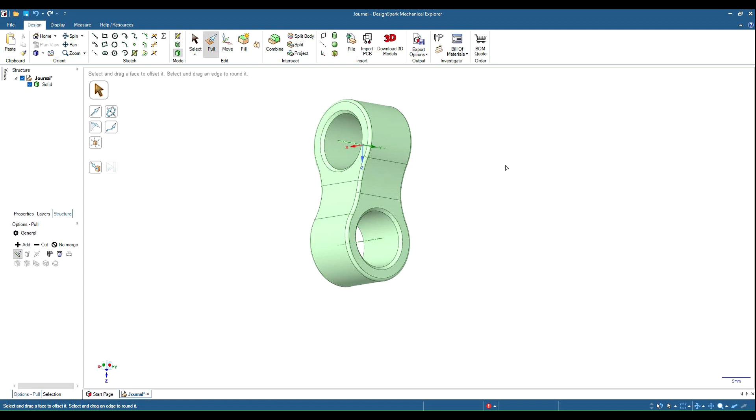This tutorial is a demonstration on how to draw this little journal sitting here in front of us. I've seen it done in some other applications and it seemed quite complex, but in DesignSpark it's not very difficult at all. So let's start with a new file.

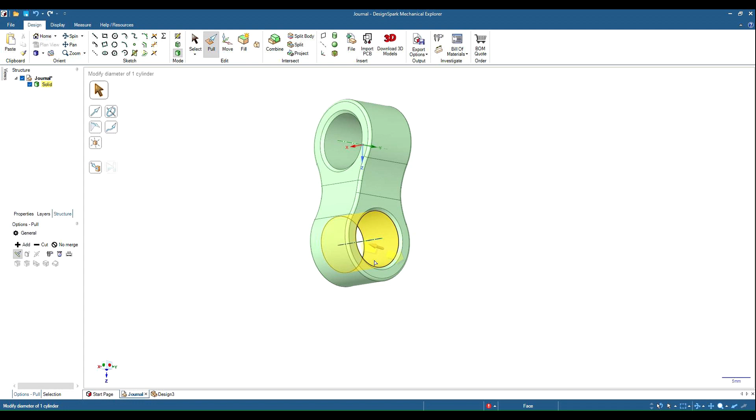We'll start with a circle, but if we go back to the original journal, if you look at it from the side, you can see that it's got a bit of a profile with a circle and a lug coming off of it. So that's where we're going to start.

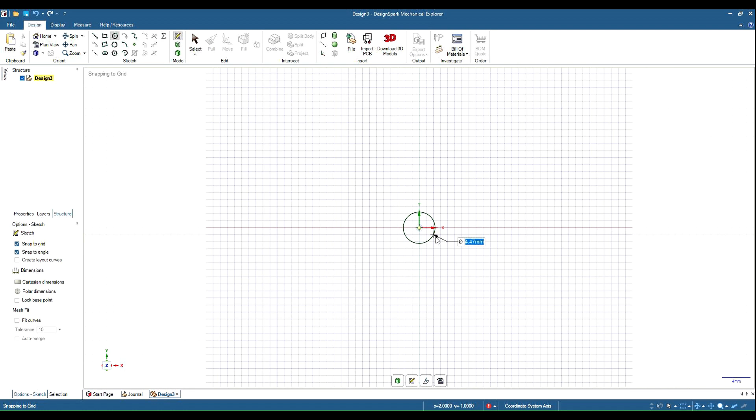So, plan view: start with a 10mm circle, followed by a 15mm circle for the outside, and I think that was 25 mils between the centers.

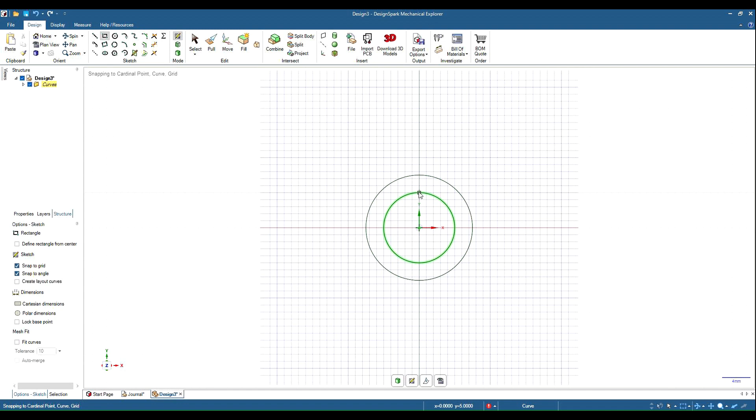So if we grab our rectangle here, you'll find the actual height of each journal is 10 mils. So if we start there, we can draw out here to the center, hit the space bar, that was 25, enter.

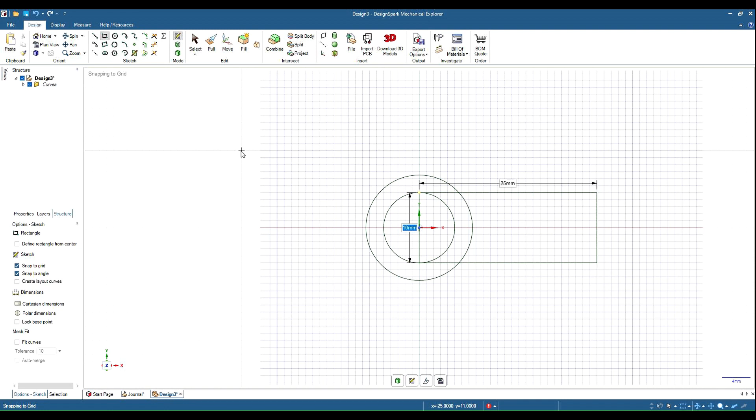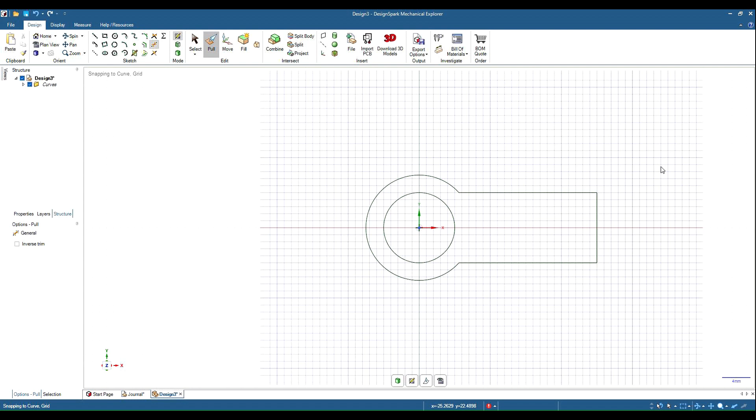Now if we grab our trim tool, we can trim things back a bit, like take that and cut things back to the basic shape of our piece. So if we can pull that now, can pull that, and it's going to be 10 mils.

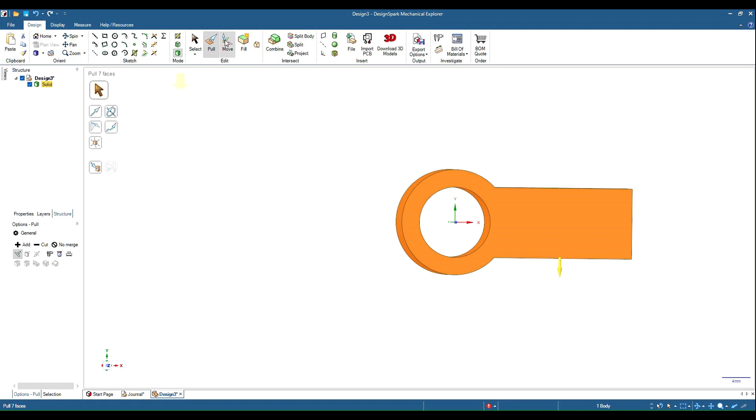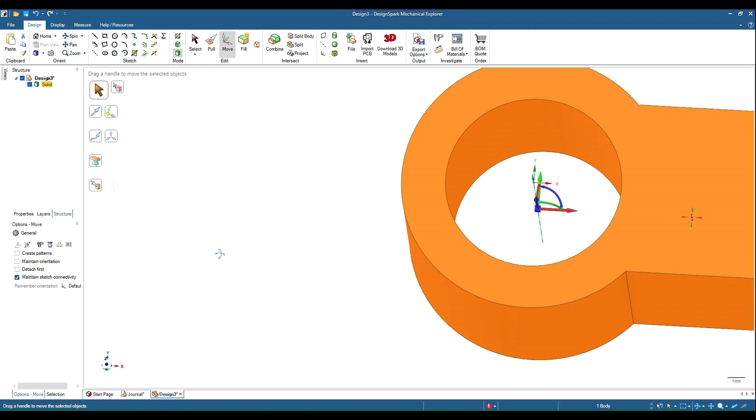And as in a previous tutorial, we do a similar sort of thing again. We draw a mark here around it, grab our move tool and move it into the center of here. Let's zoom right in and see what's going on, and we'll go like center there, back out again.

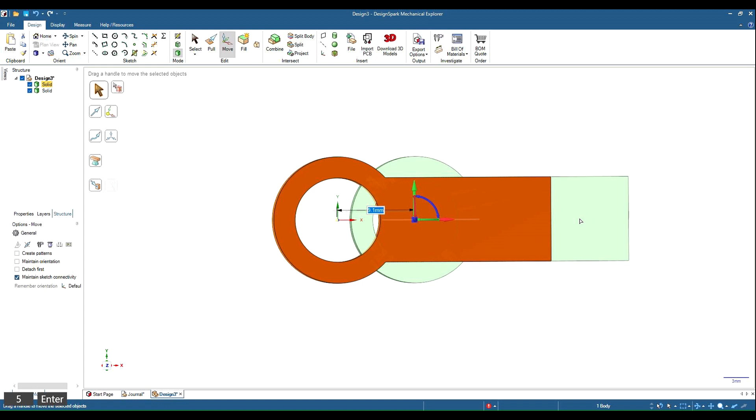So now we said with 25 mm between centers, so if we hold the control key down to duplicate, we can move that, space bar, 25, enter. Rotate it back around, space bar, 180, enter.

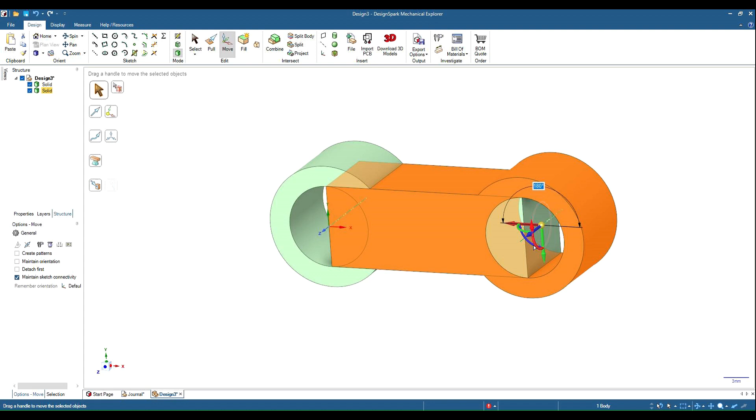Oh, there's only 180, enter. And if we go sideways here, we can grab the red tool and rotate that, space bar, 90. So there's our basic shape to start off with.

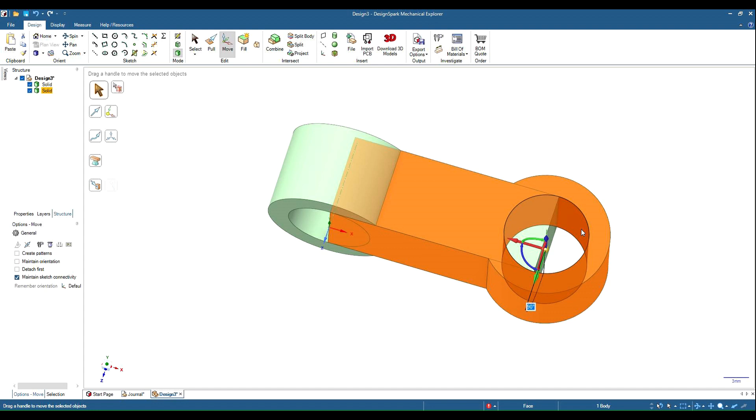Now you want to pull those bits out of there. So if we click on that circle there and fill that, hang on, yeah, move, select, that's worked. And do the same here, click on there, fill that, grab our pull tool.

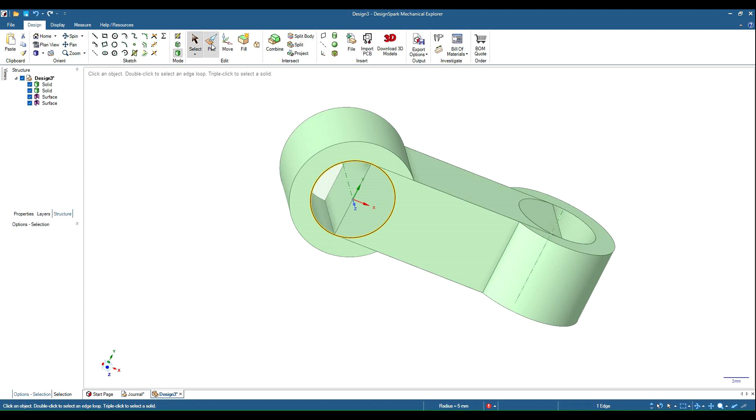Now we can click on this center, clear that right out, do the same here, clear that right out, but we might have to undo that one, Control Z, do that up here, and select cut, and pull that right out. So there we have our basic shape.

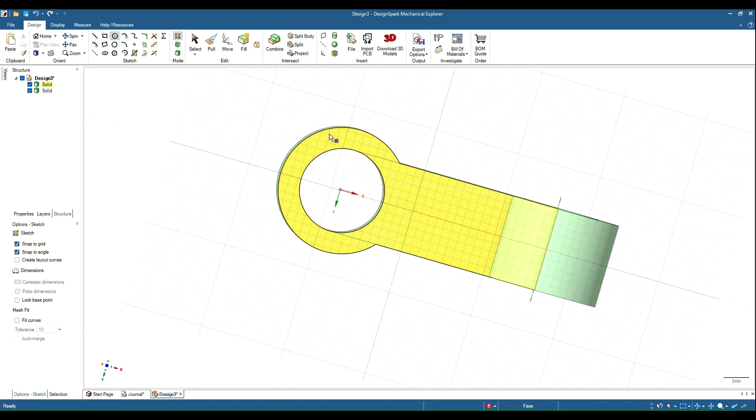Now if we grab our circle tool again, click on there and work onto the centre, and we draw a 15mm circle because that's our outer diameter. It gives us a bit of a guide for here.

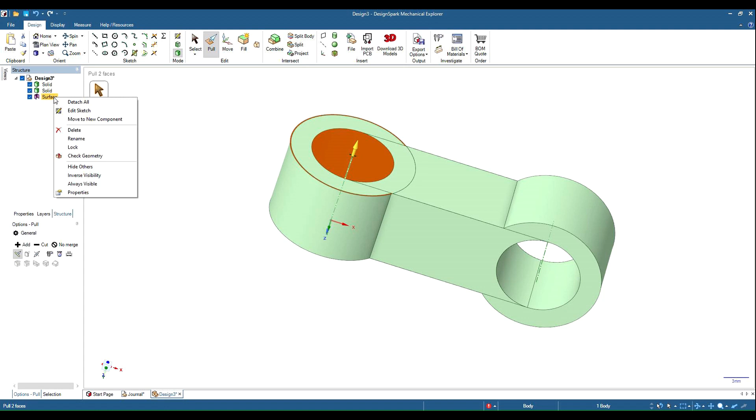So if we select pull and we grab this particular, actually first of all I think we might get rid of that surface there, delete, and we'll combine these two together. So that one and the control key, click on this other one. Now we've got one object.

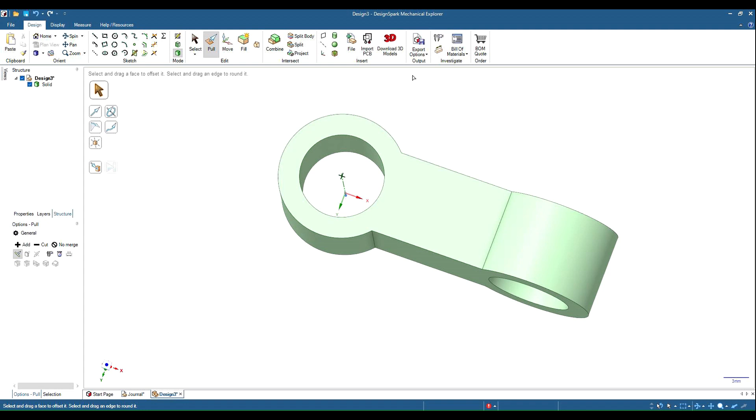So if we grab our pull tool, oh, we've lost our 15mm circle, so let's go back to that one again, to here, our 15mm circle, grab our pull tool.

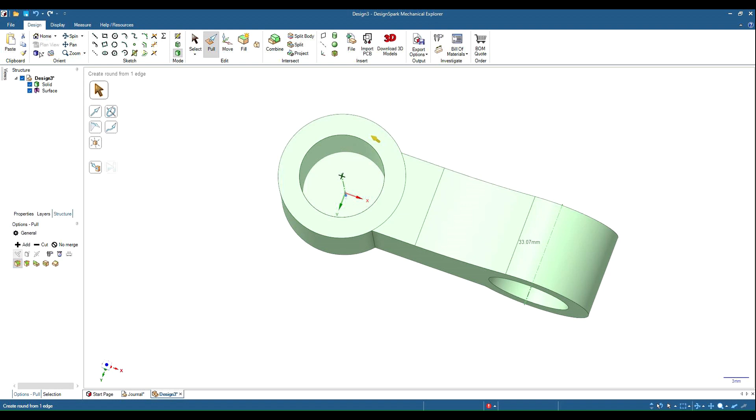If we grab this particular bit here and we create a large fillet and we keep going, we're gonna run out of space. Undo that, let's make it a bit smaller, let's try again.

As you can see now it's going to be about, let me bring that up to there, call it 55. So spacebar, 55, enter.

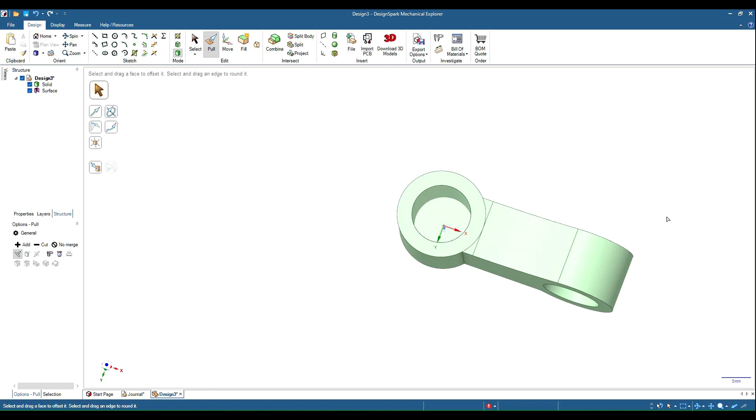Now we can get rid of that surface because it was only there so that we knew how far to pull that fillet to get it in, just click on those and we can delete those. So how far to pull the fillet without it going into that surface there.

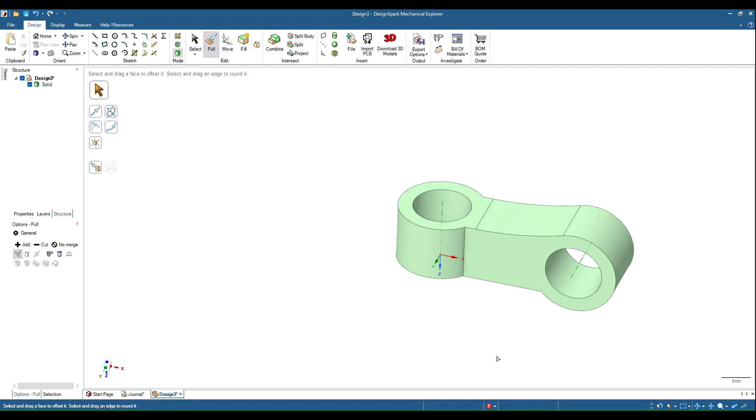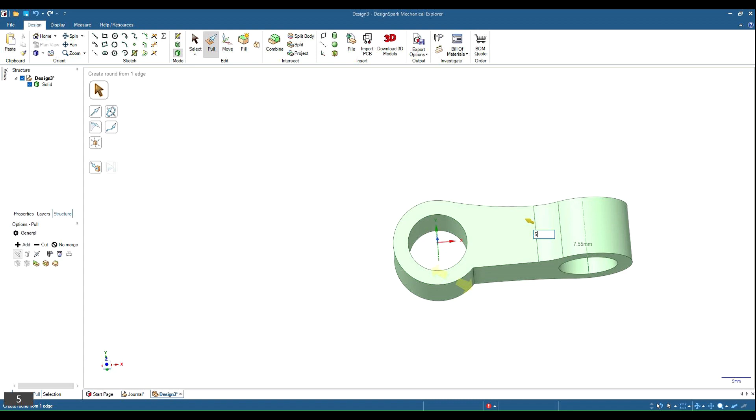So as we rotate around, we can click on this one, start over here now, spacebar 55. Same here, click on that one, spacebar 55, spacebar 55, and there we have our basic shape of our journal.

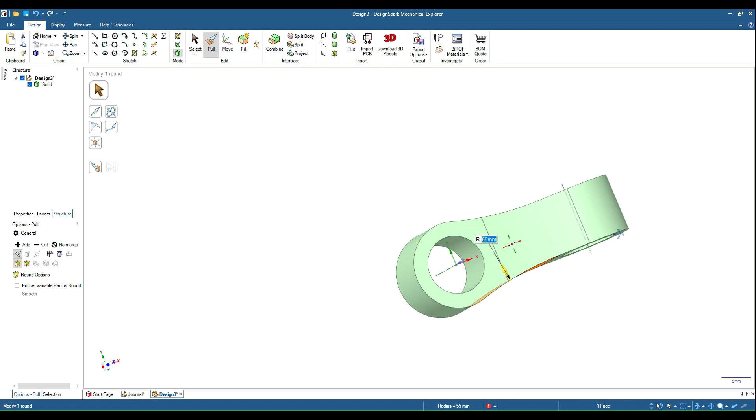So if we've got our pull tool selected, if I click around that surface there by multiple clicks, hit the spacebar, 5, enter, put a fillet right around it, and then let's put a chamfer in here, select our chamfer tool.

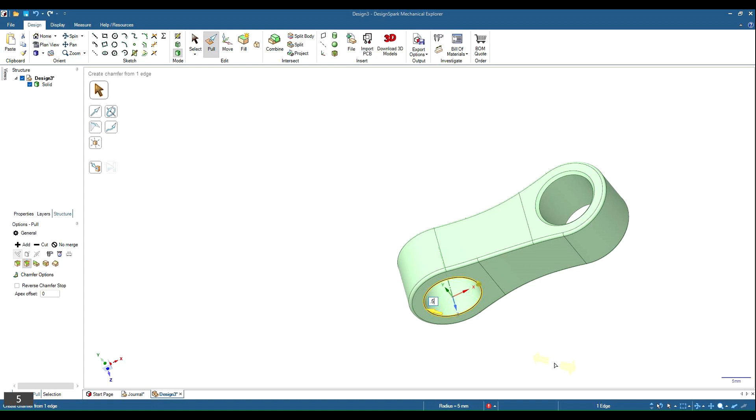0.5, spacebar 0.5, spacebar 0.5, enter, and there's our little journal.

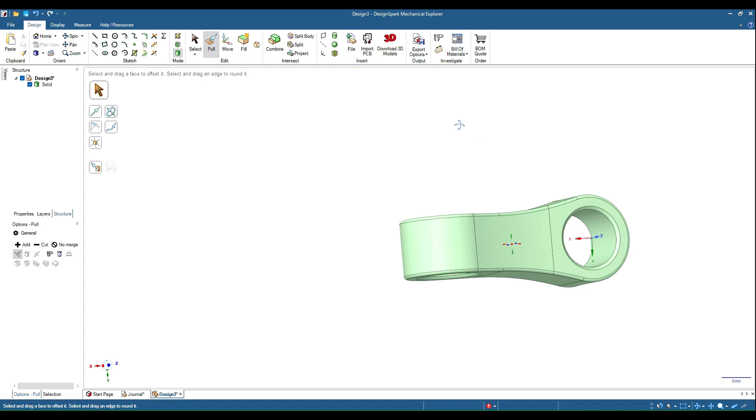We could have made the centers a bit closer together, which would have curved that fillet a little bit more, but as you can see it's quite a nice little journal running at right angles to each other.